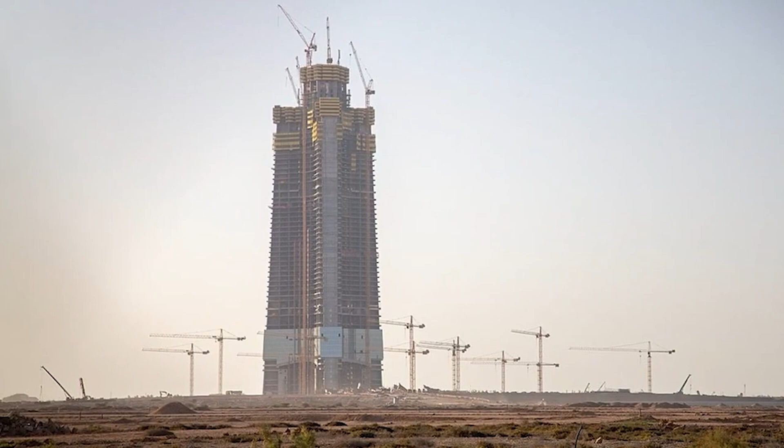It symbolizes ambition, economic confidence, and the perpetual drive for innovation. Today, no structure better embodies this quest for altitude than the Jeddah Tower in Saudi Arabia. Conceived as the planet's first 1-kilometer-tall skyscraper, it has weathered a series of setbacks and delays. Yet, in 2025, construction has officially resumed. With renewed energy and resources, the world's tallest skyscraper is once again on track to push the boundaries of what is possible in modern architecture.

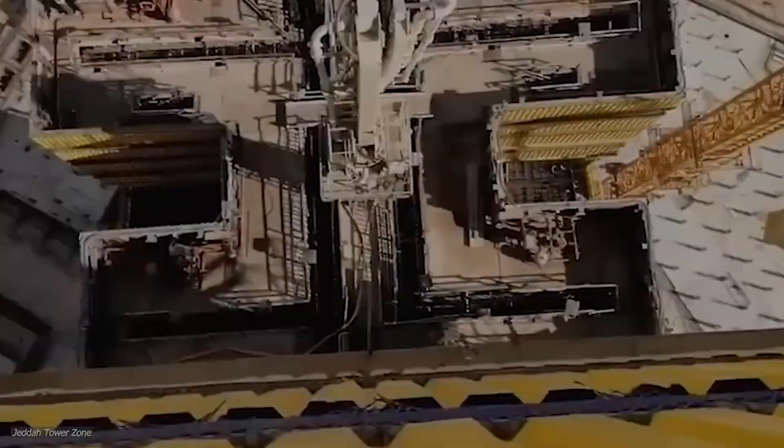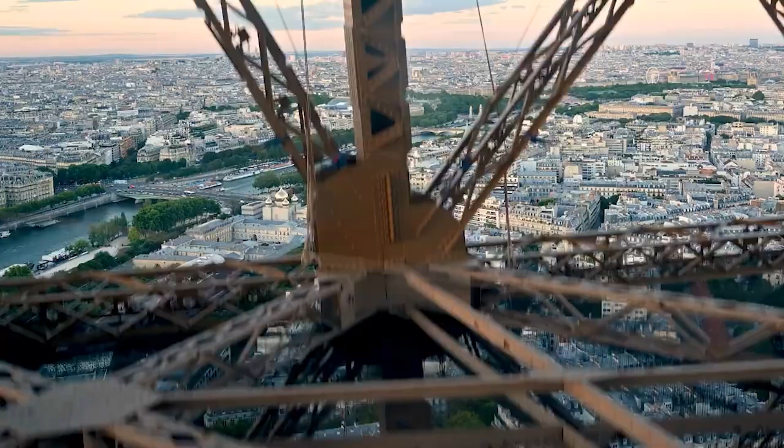Rising monuments have always been markers of societal progress. In ancient times, towering ziggurats and pyramids showcased the sophistication of their respective civilizations. As centuries rolled on, cathedrals in medieval Europe and later 19th century iron giants such as the Eiffel Tower signaled new eras in structural ingenuity.

By the early 20th century, New York City seized the spotlight with skyscrapers like the Empire State Building and Chrysler Building, each vying for the title of world's tallest. In the 21st century, that pursuit continued with dazzling results. Taipei 101 in Taiwan soared to 508 meters before Dubai's Burj Khalifa ultimately overshadowed it at 828 meters.

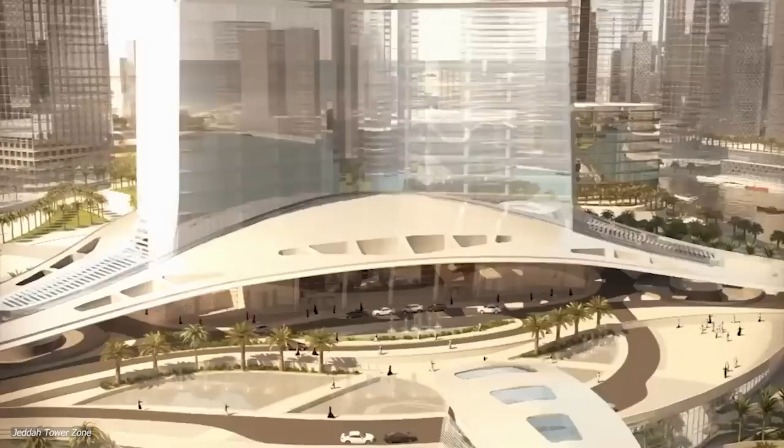This relentless push upward is steeped in more than just architectural fascination. Each structure, from Chicago's Willis to Malaysia's Petronas Twin Towers, represents aspiration, national pride, and a testament to the capabilities of modern engineering. Jeddah Tower sits comfortably in this historical continuum, intended not only to surpass all existing records, but also to mark Saudi Arabia's ambitions under the broader framework of its economic and urban development plans.

Originally announced as the Kingdom Tower, the project was conceived in the early 2000s. The plan was formidable, a 1,000-meter-tall skyscraper that would dwarf the 828-meter Burj Khalifa. Adrian Smith, the celebrated architect whose portfolio includes the Burj Khalifa, led the design team, ensuring the structure would stand as a masterstroke of both engineering and aesthetics.

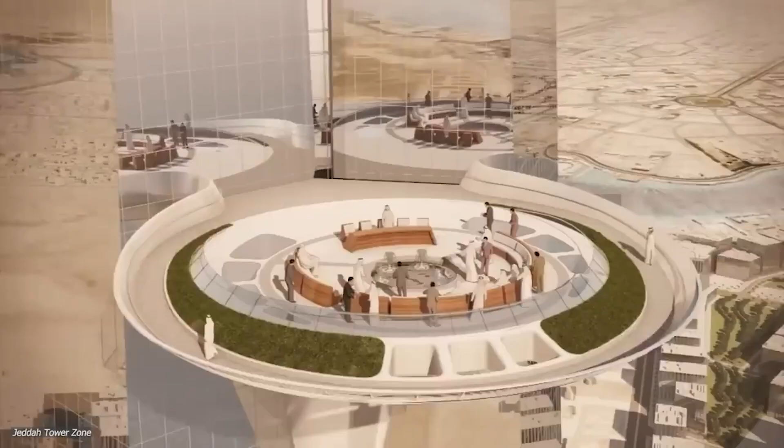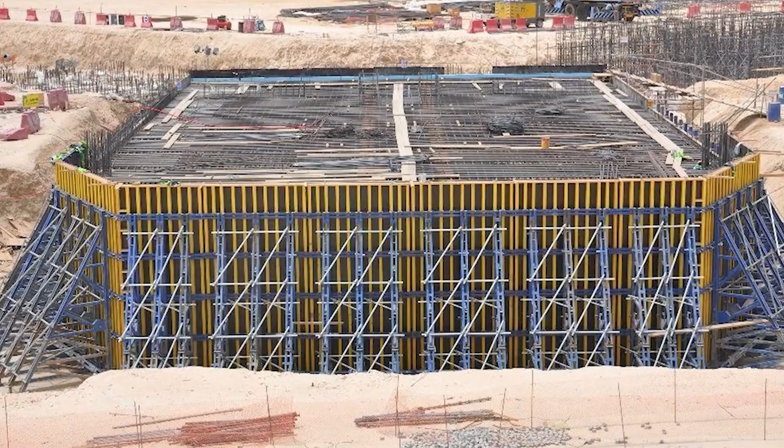The project aimed to set a new benchmark not only in height, but also in sustainability and intelligent design. The proposed cost hovered around 1.2 to 1.4 billion US dollars, a figure as staggering as the tower's height. Construction work officially kicked off in April 2013, with the foundation-laying process alone taking months of precision planning.

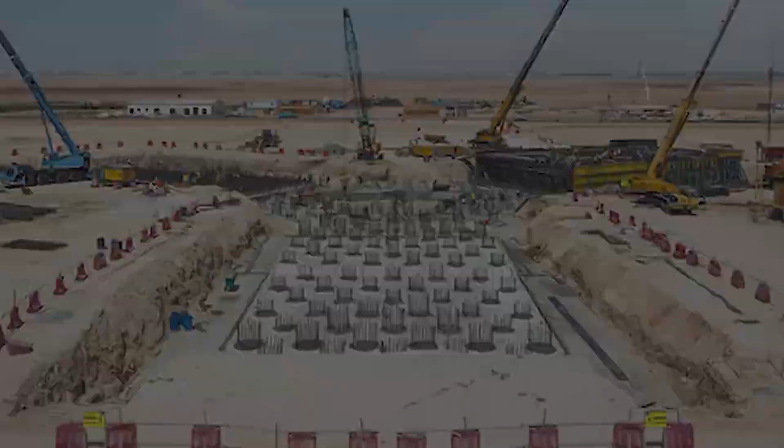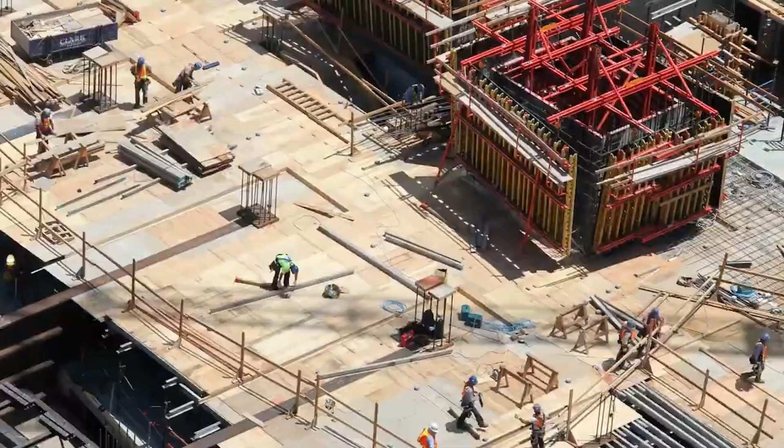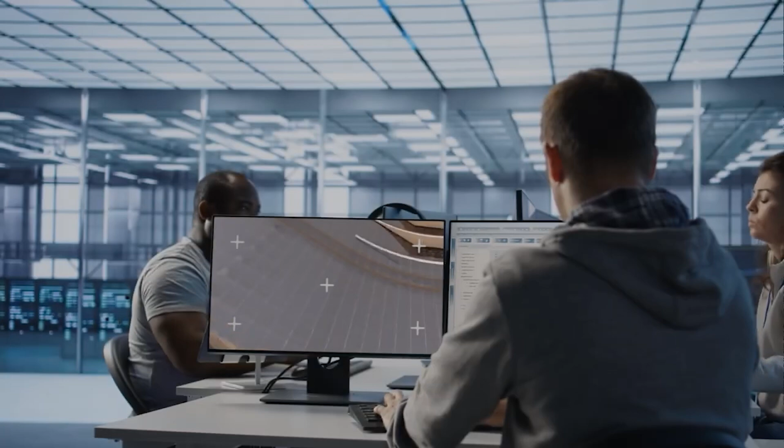Observers saw the concrete core rising floor by floor, and each milestone seemed to bring the tower closer to its ambitious final height. During this period, engineers grappled with wind load analysis, a critical factor when building at such an extreme altitude. The aerodynamics of a 1,000-meter structure had to be meticulously calculated, requiring repeated wind tunnel tests and computational modeling.

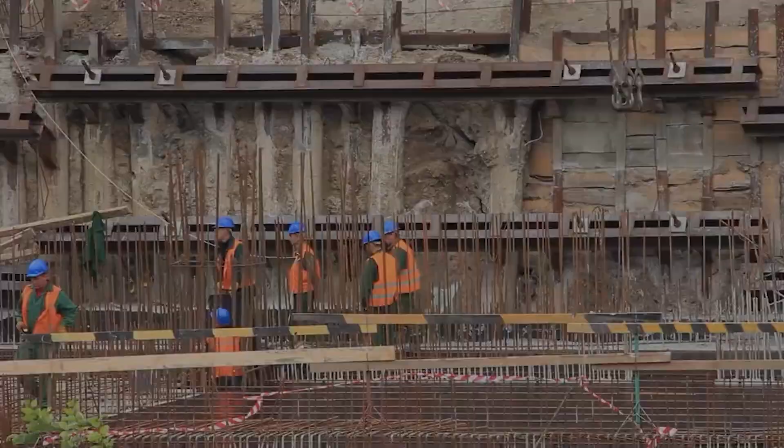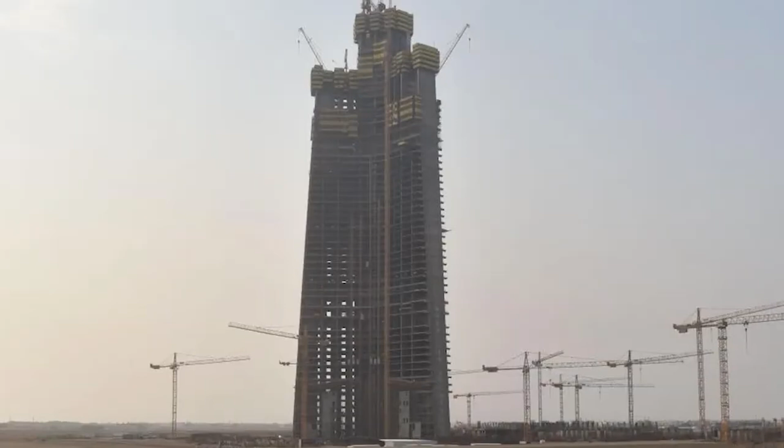As the tower's site sat idle, several factors compounded its stall. The global economic landscape, influenced by geopolitical tensions and market cycles, played a key role. By 2020, the COVID-19 pandemic dealt an additional blow to major construction initiatives worldwide, halting supply chains and labor availability. Although plans never fully vanished, progress on Jeddah Tower became more of a question mark than a certainty.

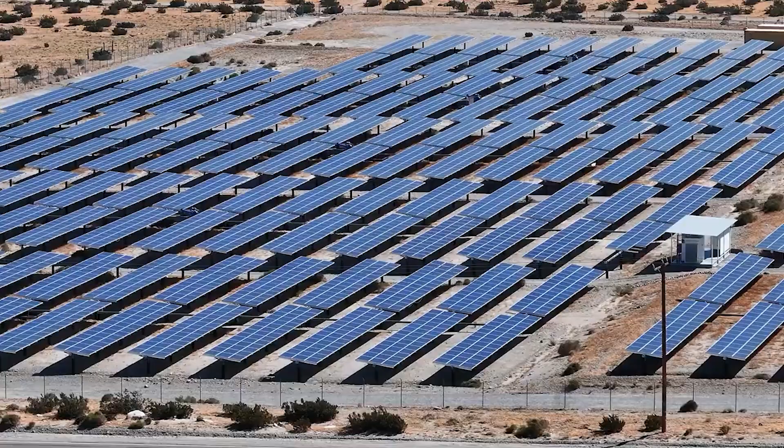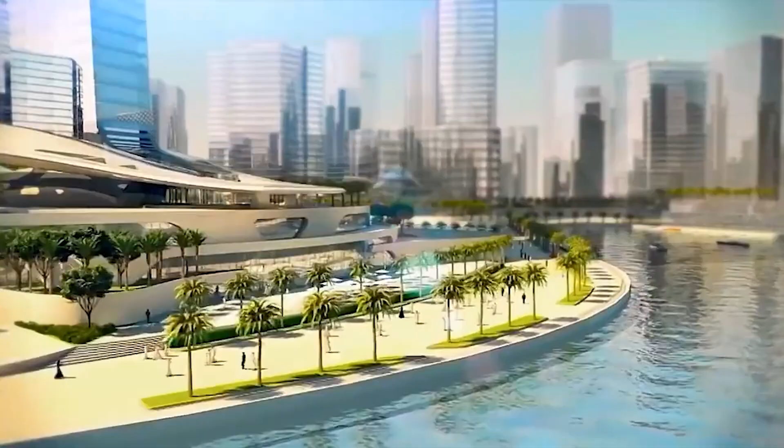These years were marked by introspection within the Saudi development sector. Megaprojects like NEOM, a planned cross-border smart city, and vast initiatives in renewable energy and tourism began to reshape the national agenda. The Jeddah Tower risked being overshadowed by the sheer scope of other grand-scale undertakings. Yet, the tower's symbolic value as a future global icon remained strong in the collective mindset, both nationally and internationally.

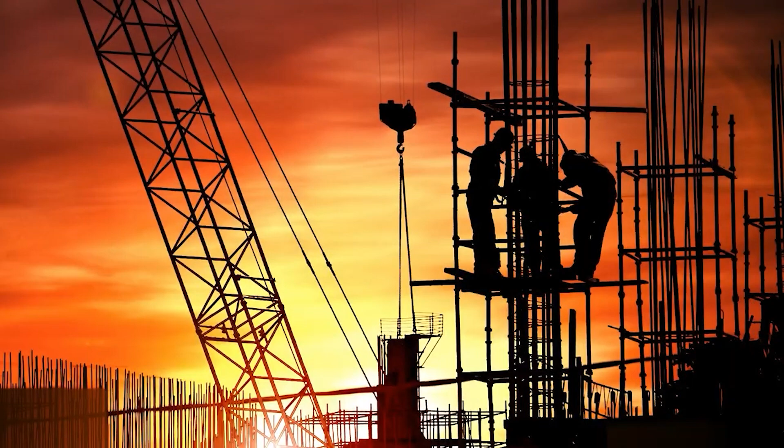Behind the scenes, the tower's backers were restructuring finances and forging new partnerships to revive the project. The Jeddah Economic Company, overseeing the tower's development, reportedly entered negotiations with a consortium of global firms, aiming to secure investments that would facilitate the tower's completion.

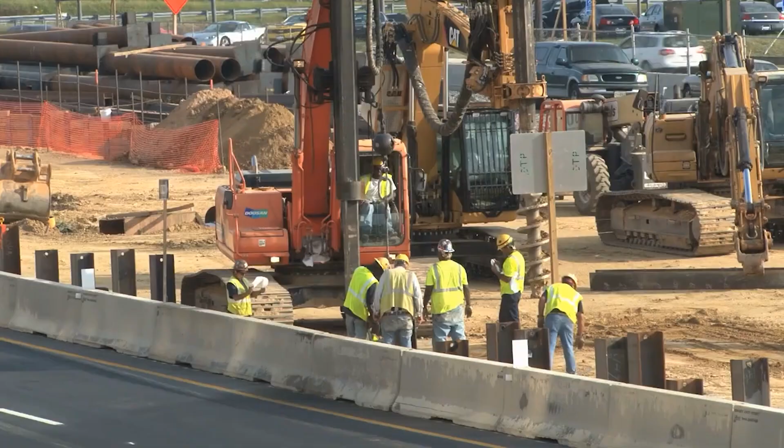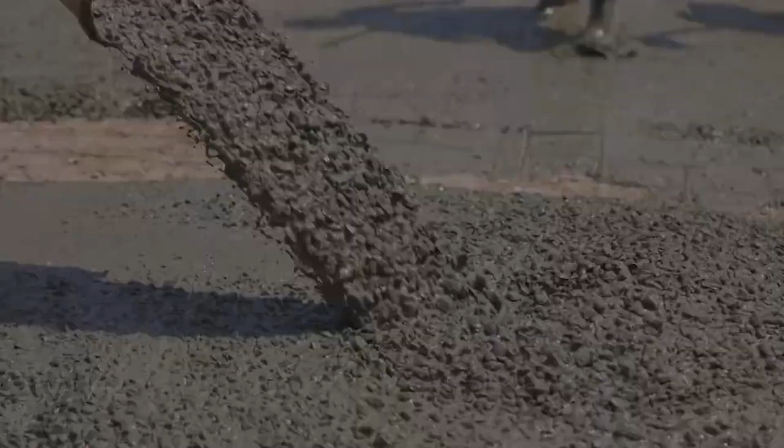Meanwhile, architects and engineers revisited design blueprints to incorporate new structural materials and technologies introduced since the project's inception. Of particular interest was the exploration of high-performance concrete blends capable of withstanding not just compressive forces, but also the temperature extremes typical of the coastal climate near the Red Sea.

Another area that commanded attention was the building's elevator technology. Traveling up to 1 kilometer in height requires advanced systems capable of moving at over 10 meters per second, all while prioritizing passenger comfort and safety. In 2023, experts reconvened to test new generation elevator prototypes, ensuring that the ride experience in the world's tallest building would be not only efficient but also seamless.

In early 2025, official news broke. Construction of the Jeddah Tower had resumed.

This announcement came as a direct result of renewed local and international investment, coupled with a renewed strategic focus on completing landmark projects ahead of Saudi Arabia's Vision 2030 agenda. Cranes that had sat idle for years swung back into action, and a fresh influx of workers returned to the site. The tower's reinforced concrete core began to rise once again, with newly updated construction timetables projecting incremental growth on a monthly basis.

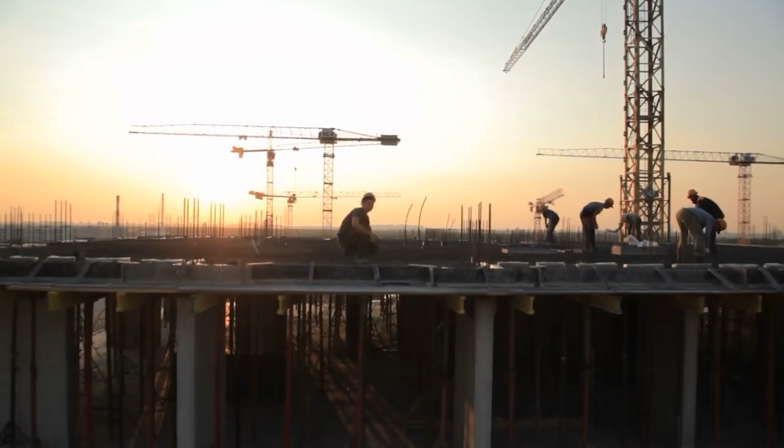Media outlets around the globe quickly caught wind of the development. Some drew parallels with the Burj Khalifa's own rapid rise, forecasting that Jeddah Tower might reach its final height by 2028 or 2029 if the current pace holds. Engineers on the ground reported that the advanced materials now being utilized would accelerate construction while simultaneously reducing costs. For onlookers, seeing the cranes in motion once more was both a relief and a tangible sign of Saudi Arabia's determination to complete what has been touted as a crowning achievement in architectural ambition.

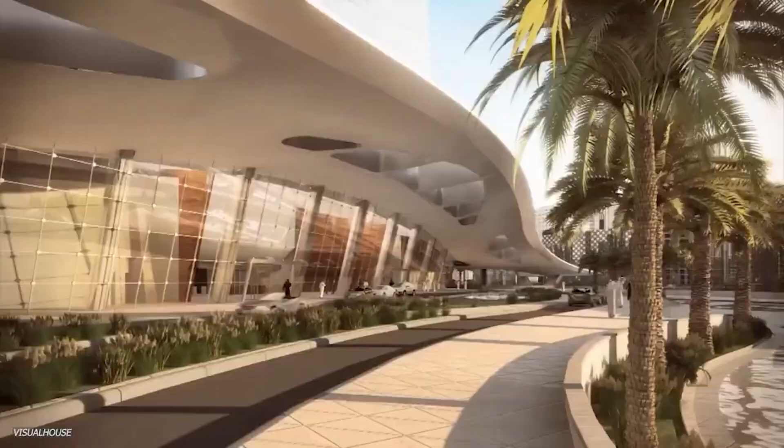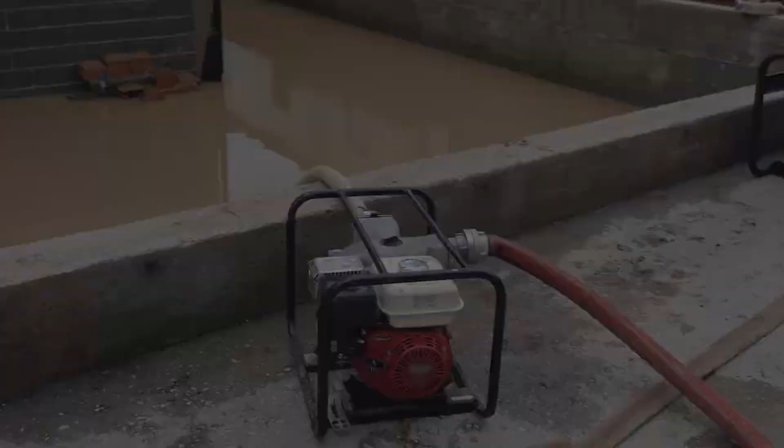From an environmental standpoint, megatall projects like the Jeddah Tower do not come without concerns. Such skyscrapers demand vast quantities of resources, including steel, concrete, and water. In a region already grappling with high temperatures and limited freshwater reserves, sustainability is a constant discussion point. The tower's design includes systems for rainwater collection and highly efficient air conditioning technologies intended to reduce overall energy usage. As climate awareness grows, the project's architects and developers acknowledge that meeting rigorous sustainability standards is an ongoing imperative.

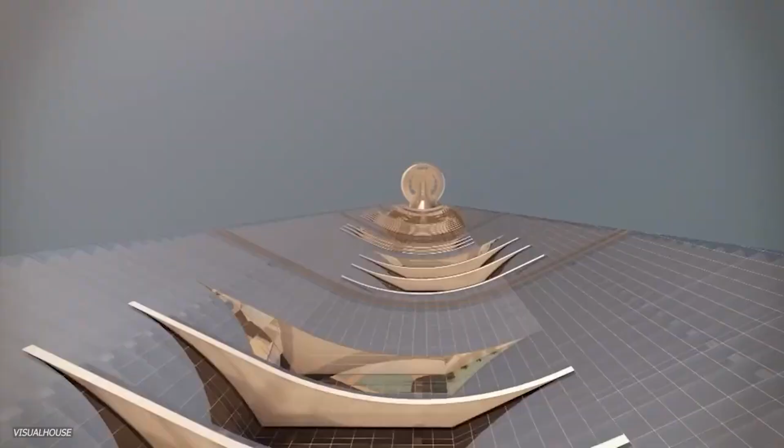Economically, the tower promises to become a centerpiece of the larger Jeddah Economic City development, an area intended to feature commercial, residential, and entertainment districts. Proponents argue that such a project will create jobs, attract tourism, and highlight Saudi Arabia as a hub of innovation. However, analysts have noted that economic returns are not always guaranteed. Market demand for high-end real estate fluctuates, and the long-term success of the tower depends on broader urban planning strategies, infrastructure readiness, and global economic stability.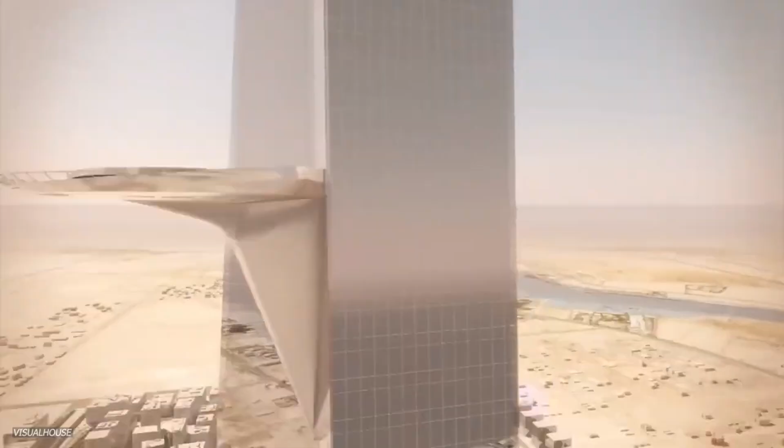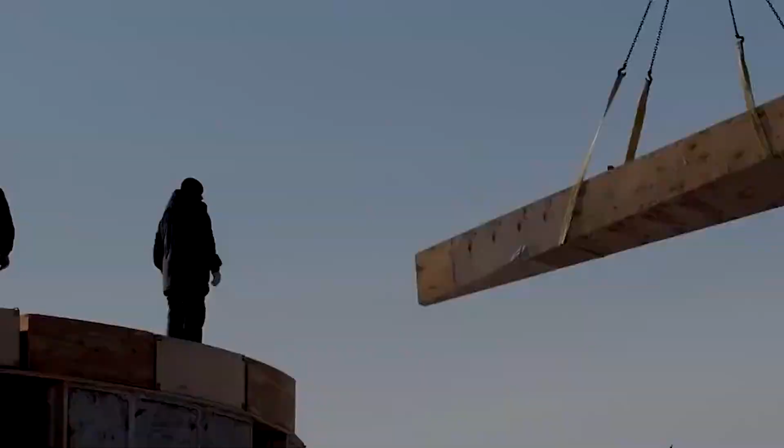If completed as planned, the Jeddah Tower will fundamentally reshape both the physical skyline of Jeddah and the symbolic skyline of global skyscraper development. Standing at over 1,000 meters, it will surpass the Burj Khalifa by over 170 meters. Beyond its sheer size, the tower stands as a potential model for how cutting-edge engineering principles can be adapted in extreme conditions. The project team has consistently integrated new software and hardware solutions, from self-climbing formwork to real-time structural health monitoring systems, capable of sending alerts if stress or wind loads exceed tolerable limits.

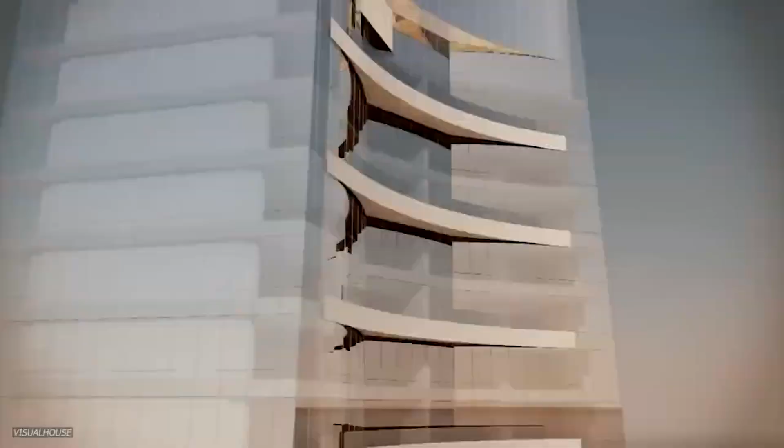The tower is also set to incorporate mixed-use functionalities. Observers can expect luxury hotels, office spaces, residential apartments, and an observation deck perched at a breathtaking altitude, likely the highest publicly accessible viewpoint in the world. This multi-use approach is designed to ensure the tower's long-term viability, catering to both commercial interest and tourism. As global economies trend toward urban density, Jeddah Tower may also offer a glimpse into vertical urban planning, a concept that could become more relevant in congested cities around the globe.

Today, with construction back on track, the Jeddah Tower stands as a grand experiment in how far human ingenuity can stretch upward. Every poured concrete slab, every steel beam, and every innovative design element is bringing this 1-kilometer-high dream closer to reality. It is a bold endeavor, reflecting a broader shift in Saudi Arabia's development strategy and resonating with the world's ongoing fascination for monumental architecture.

Yet as the tower nears completion, its significance extends beyond mere records. It speaks to the capacity of modern engineering to overcome challenges, both economic and environmental, and to elevate entire communities in the process. Should the Jeddah Tower be completed within the new proposed timeline, it will redefine the limits of the skyscraper as we know it. Its final form will serve as a testimony to the human desire to reach new summits of possibility.

In an era where sustainability, resource constraints, and economic diversification are at the forefront of global discourse, the tower's success or failure will carry profound lessons for future projects. From its inception to its current phase, Jeddah Tower illustrates how ambition, coupled with persistent innovation, continues to drive us toward extraordinary feats. As we look ahead, one cannot help but wonder, how long before another visionary project arises to eclipse even this towering milestone, proving once again that humanity's reach is always inching toward the sky?

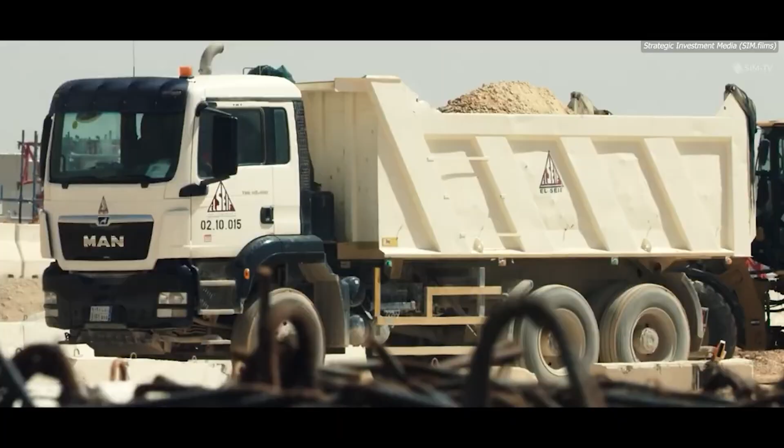Saudi Arabia is undergoing one of the largest and most ambitious transformations the world has ever seen. By 2028, it is expected to become the largest construction market in the world. At the heart of this change is Vision 2030, a national plan to diversify the country's economy and reduce its reliance on oil. For decades, Saudi Arabia has been known as one of the largest oil producers in the world. But now, the kingdom is focusing on a future where its economy is built on industries beyond oil.

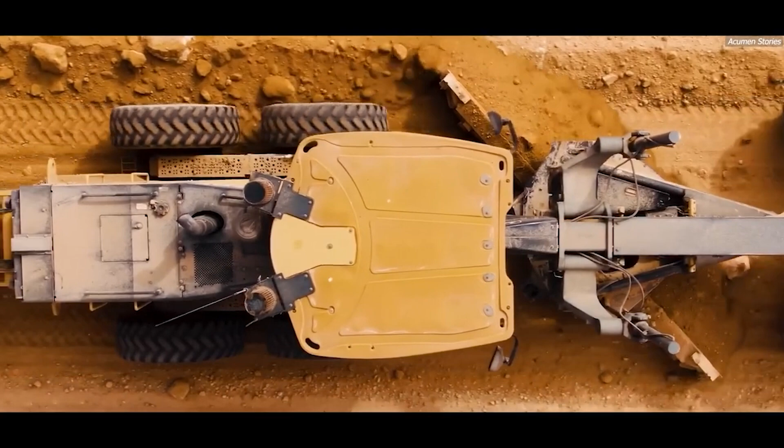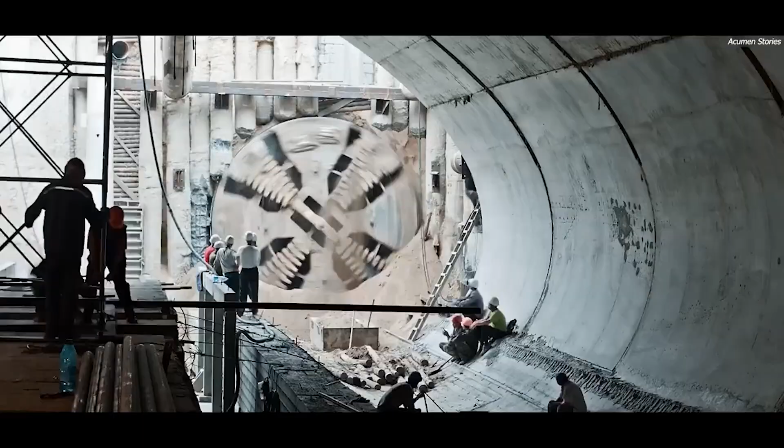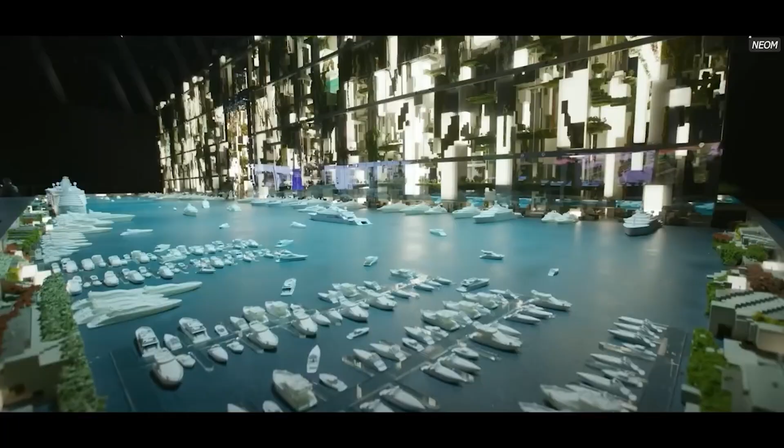The numbers tell the story. The Saudi construction market is expected to grow to a staggering $1.6 trillion by 2028, surpassing other global leaders. This growth is fueled by investments in megaprojects, urban development, tourism, technology, and more. At the center of this transformation is a series of groundbreaking megaprojects that aim to reshape Saudi Arabia's economy and global reputation. The most famous among them is NEOM, a futuristic city being built from scratch in the northwest of the country along the Red Sea. NEOM spans an area of over 26,500 square kilometers, nearly the size of Albania or Israel.

It is designed to integrate advanced technologies, sustainability, and modern urban planning, serving as a model for future cities around the globe. One of the most talked about components of NEOM is the Line, a revolutionary linear city.

Stretching for 170 kilometers, the Line is planned to house up to 9 million residents in 2 parallel skyscrapers that rise 500 meters into the sky and are only 200 meters apart. These structures will feature mirrored facades, reflecting the surrounding desert and coastline.

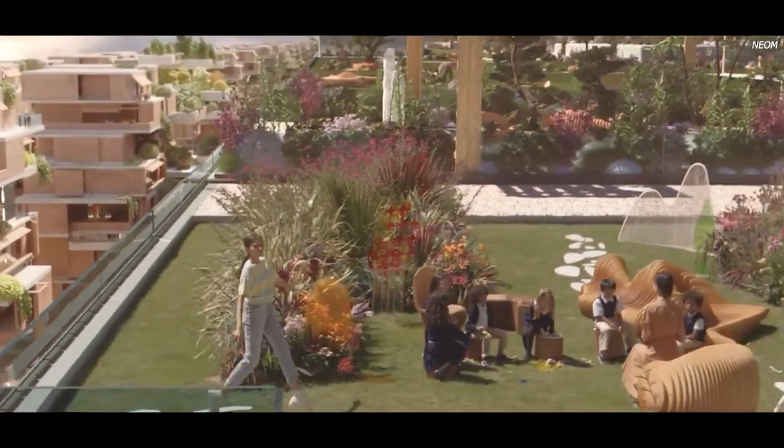Unlike traditional cities, the Line will have no cars, no streets, and no sprawling suburbs. Instead, transportation will rely on high-speed trains and autonomous vehicles, with a focus on walkability. Designed to be powered entirely by renewable energy, the Line's unique vertical design aims to minimize land use while providing residents with seamless access to amenities within a 5-minute walk.

NEOM also includes other ambitious sub-projects, such as Oxagon, envisioned as the world's largest floating industrial complex, designed to revolutionize manufacturing and trade with advanced robotics and AI-driven operations.

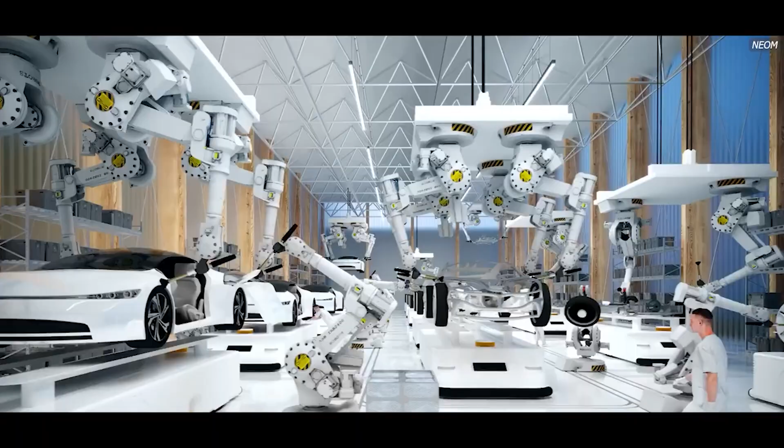Another is Trojena, a year-round mountain tourism destination featuring a ski resort in the Arabian Peninsula's Tabuk region, complete with artificial lakes, hiking trails, and luxury accommodations. Trojena is also set to host the Asian Winter Games in 2029, a bold move showcasing Saudi Arabia's ambition to be a global leader in unique tourism experiences.

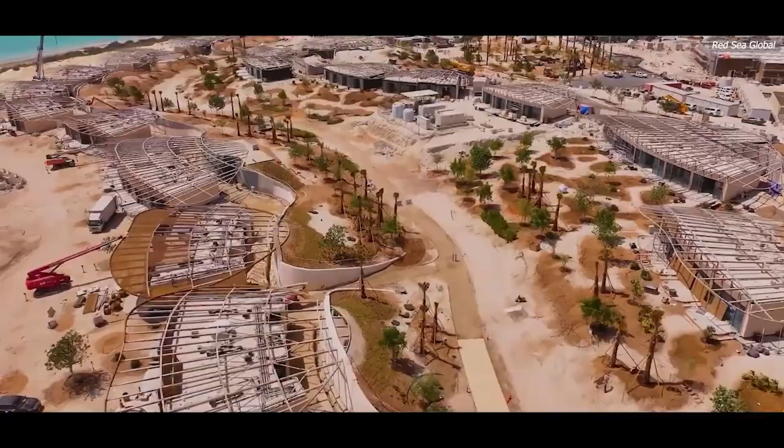Meanwhile, the Red Sea project represents another pillar of Saudi Arabia's transformation. Spanning over 28,000 square kilometers, this tourism-focused development encompasses pristine beaches, volcanic landscapes, and 90 untouched islands along the Red Sea coast. It aims to create a sustainable luxury destination, integrating eco-friendly practices with high-end tourism.

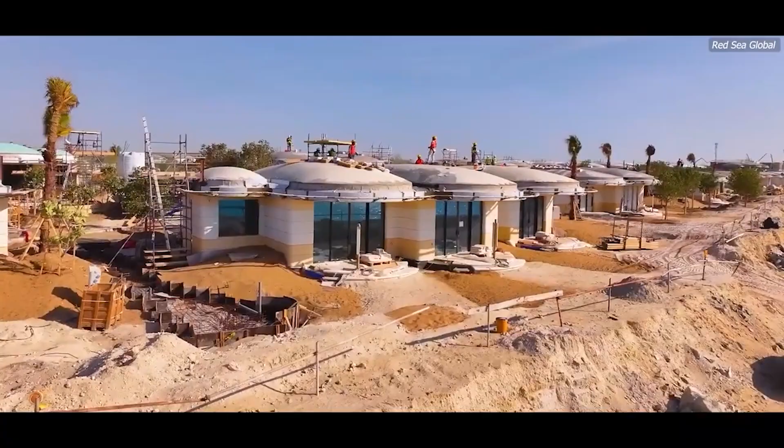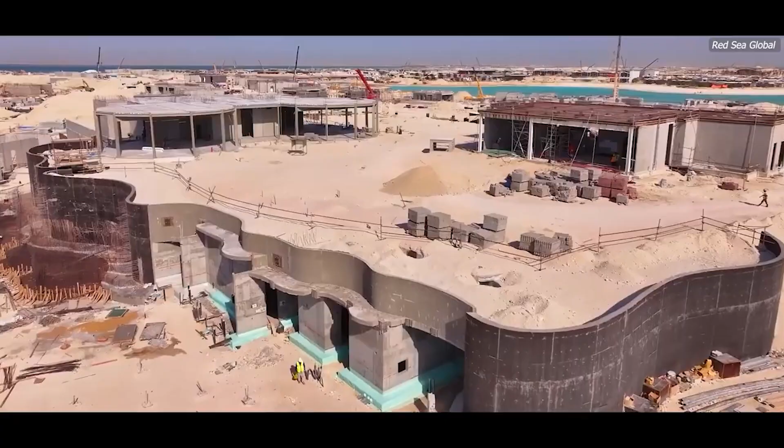The development includes over 50 hotels and resorts, offering 8,000 rooms upon completion. Advanced infrastructure, such as an airport specifically designed for the project, will connect the area to international markets. The Red Sea project promises unique experiences like coral reef diving, eco-tours, and wellness retreats, appealing to global travelers seeking exclusive and sustainable destinations.

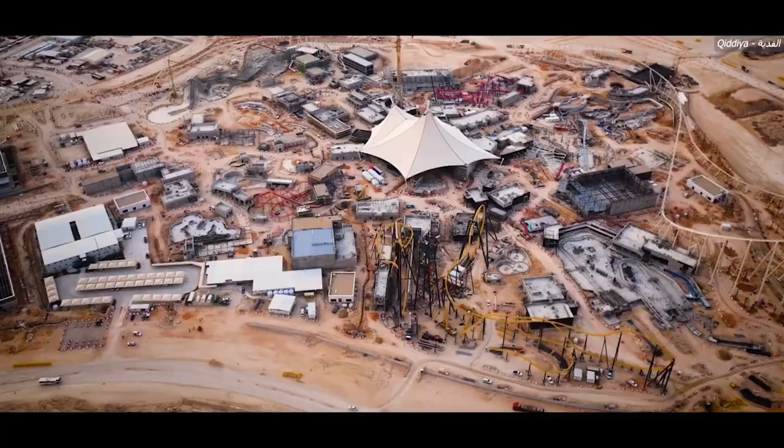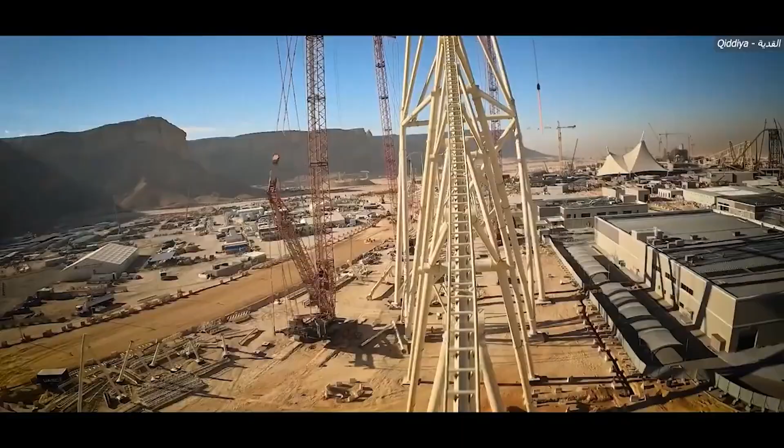Qiddiya, located just outside Riyadh, is set to be Saudi Arabia's flagship entertainment hub. Covering over 334 square kilometers, Qiddiya is planned to offer a wide range of attractions, including 5 distinct clusters: theme parks, sports and wellness centers, nature and environment zones, arts and culture spaces, and motion and mobility venues.

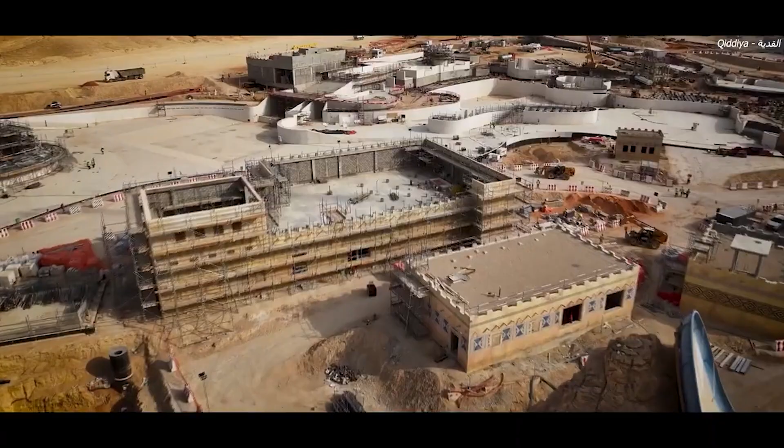It will feature a Six Flags theme park designed to host the world's tallest, fastest, and longest roller coasters. Qiddiya is also building a Formula One racetrack, which will bring the pinnacle of motorsport to Saudi Arabia and attract global audiences. Beyond entertainment, Qiddiya will include facilities for professional sports, including football, basketball, and other major events, aiming to promote local talent and engage international visitors.

Together, these projects demonstrate Saudi Arabia's ambitious strategy to position itself as a global leader in urban innovation, tourism, and entertainment. While the scale of these initiatives is unprecedented, their success will depend on effective planning, execution, and the ability to attract residents, businesses, and tourists alike.

These megaprojects are part of a larger effort to reshape cities across the kingdom. Riyadh, the capital, is undergoing rapid expansion with plans to grow its population from 7.5 million to over 15 million by 2030. To support this growth, over $22 billion is being invested in public transportation, including new metro and bus systems.

The country is also focusing on connectivity. The Haramain high-speed railway now links the holy cities of Mecca and Medina with Jeddah, cutting travel time from hours to under 2.5 hours. But transforming the country's infrastructure requires more than just money.

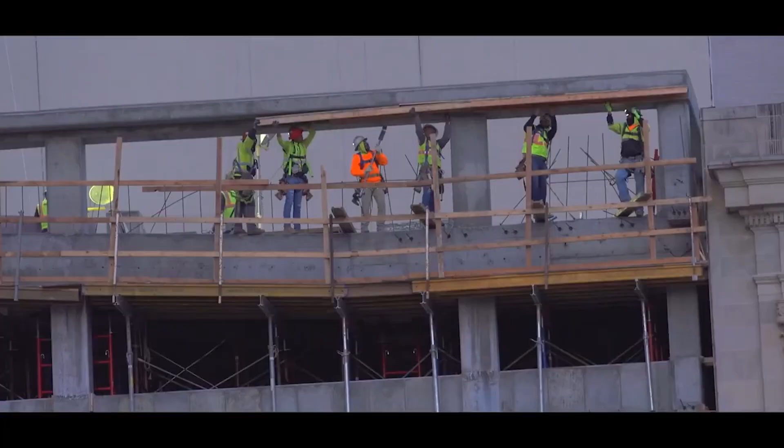It requires people. Saudi Arabia is now one of the largest employers in the construction industry, with millions of workers involved in these projects. The government has also introduced programs to train its citizens, aiming to increase the number of skilled Saudi workers in the sector.

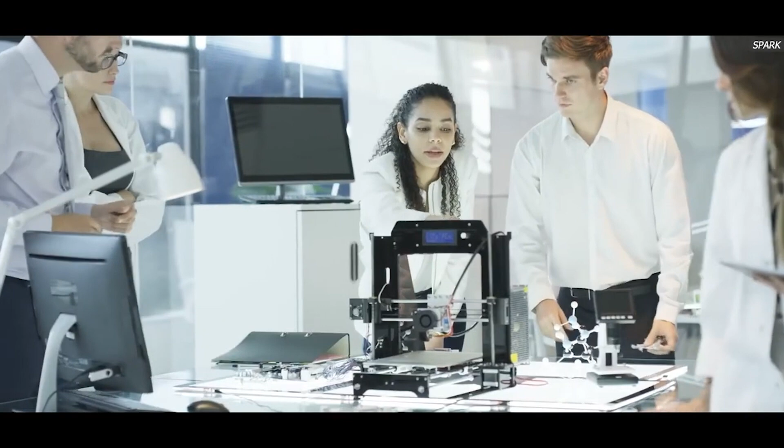Beyond urban development, the kingdom is heavily investing in its industrial base. The King Salman Energy Park, or SPARK, is a massive industrial city designed to support energy, manufacturing, and logistics. It is expected to create 100,000 direct and indirect jobs and generate $6 billion annually for the Saudi economy.

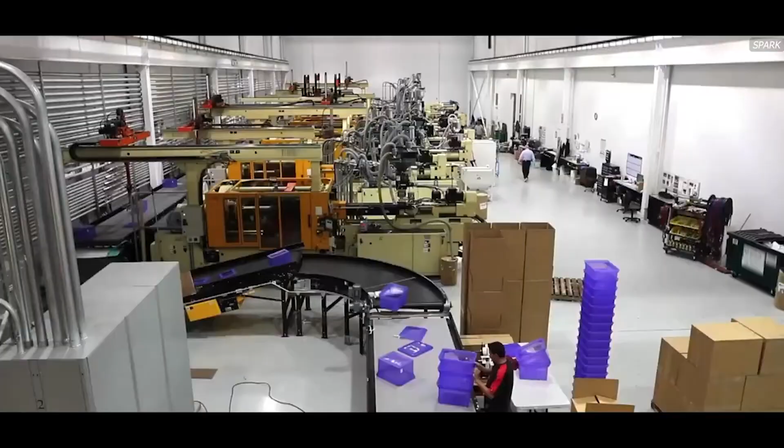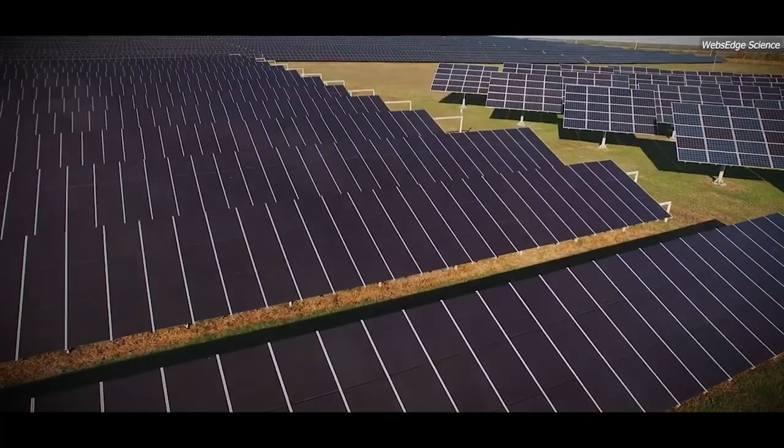Meanwhile, Saudi Arabia is also establishing itself as a leader in technology and innovation. Projects like the King Abdulaziz City for Science and Technology aim to make the country a hub for research, development, and tech startups. Saudi Arabia's ports and logistics infrastructure are also expanding. The King Abdullah Port is now one of the fastest-growing ports in the world and is central to the country's goal of becoming a global trade hub.

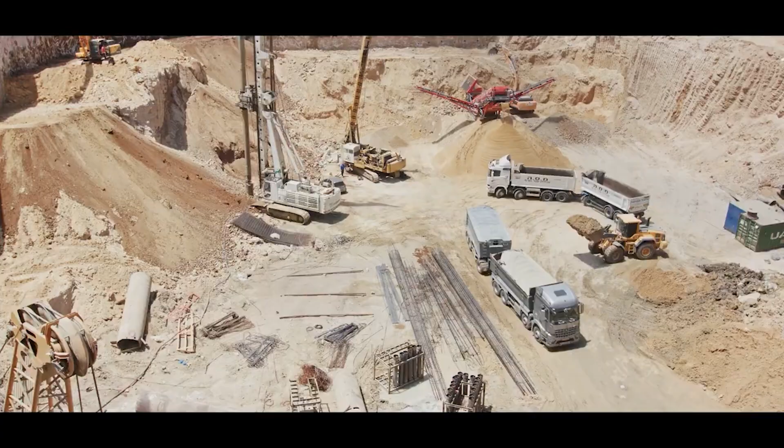All of these developments align with Vision 2030, a blueprint for a post-oil future. But achieving this vision is not without its challenges. Large-scale construction comes with financial, logistical, and workforce-related obstacles. Delays and budget overruns are risks that need to be managed carefully.

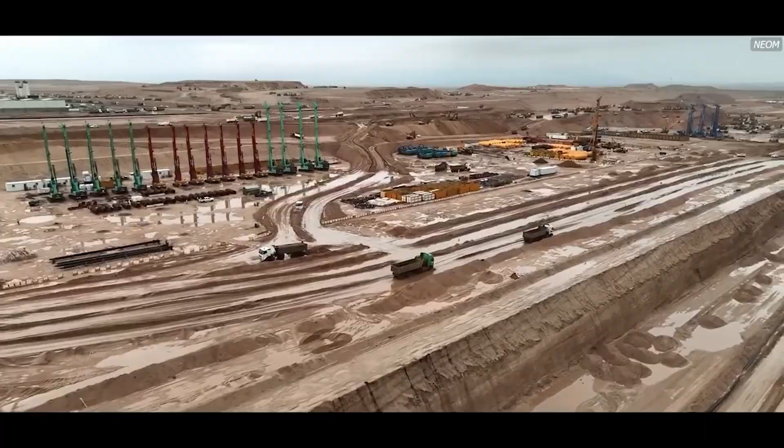Experts point out that while these projects are impressive in scale, ensuring their long-term sustainability and utility will be crucial. It's not just about building new cities or attractions. It's about creating places where people will want to live, work, and visit for generations to come.

While the construction market is booming, the kingdom is also preserving its cultural heritage. Projects like Diriyah Gate, the birthplace of modern Saudi Arabia, combine historical restoration with modern development, aiming to attract tourists and educate future generations. By 2028, Saudi Arabia aims to be the world's largest construction market, a position driven by Vision 2030's bold ambitions.